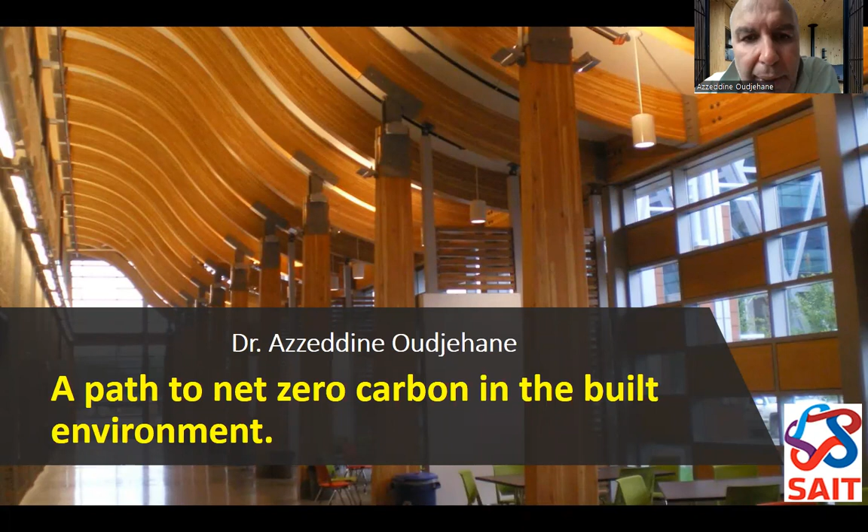My name is Azzeddine Oudjehane, and I welcome you from SAIT, Southern Alberta Institute of Technology. Of course, I'm not in Paris—these days I'm currently in Barcelona recording this video.

So briefly, who we are: SAIT, Southern Alberta Institute of Technology, College Polytechnic in Calgary, Alberta. You can see on the map, in the western part of Canada, east of the Rockies. In the picture you have a view of our building on campus, the School of Construction, where I teach as part of the construction management program, and where we emphasize not only construction, but also building better, sustainable construction for the future of the planet.

Myself, briefly, I've been involved in many projects over the past 30 years with experience primarily in R&D and innovation, also serving as board director for CaGBC, Canadian Green Building Council, for the Alberta chapter. Sustainability has always been a driver for my activities, and as a professor, as a trainer, as an educator, we try to bring the next generation to be conscientious about the planet and help them achieve the challenges we face.

Quickly, I would like to acknowledge a partnership that has enabled this work, focused on sustainability, working with European partners on how to build better with mass timber, with wood, and achieve sustainable goals in a common cause. The Europeans, Canada, and North America all have that objective in mind and how to achieve it.

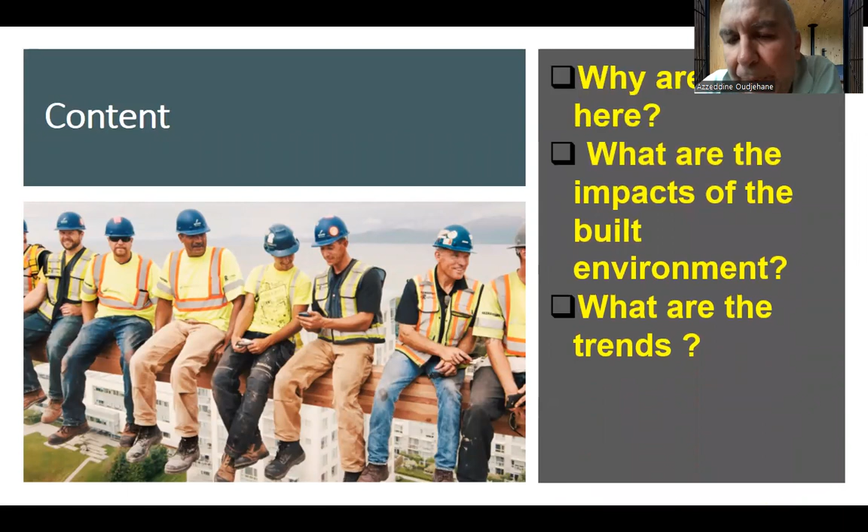So briefly today, what my talk will be this morning, focused around four key points. First of all, why are we here, and then what are the impacts on the built environment, but also what are the trends—are things changing in construction globally? And lastly, suggestions for one path to achieve net zero, or hopefully maybe carbon negative, by 2050.

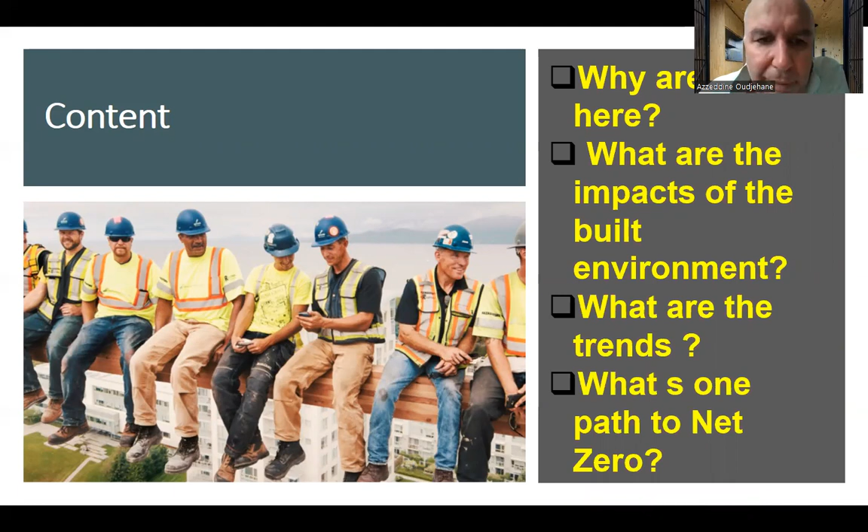So why are we here? Well, the planet is burning. Facts are there. But before we get going, I'll address two polls throughout this session, hopefully live with participants. This would be a recording that we play during the time slot for my presentation.

The first question I want to ask the audience is: is net zero achievable by 2050? What are you thinking? What are your thoughts on that? The audience is probably international here—do you think that is something we can achieve by 2050?

To do the poll, the question again is: net zero achievable by 2050. You have two ways to do it—use the QR code appearing here if you're using a phone device, or use a web browser going to www.menti.com and use the code showing on the slide, 78658815. I'll pause for a few seconds to allow everybody to capture the code and the website, or use the QR code. Again, the question is simple: is net zero achievable by 2050 in your country, or what are your thoughts on that?

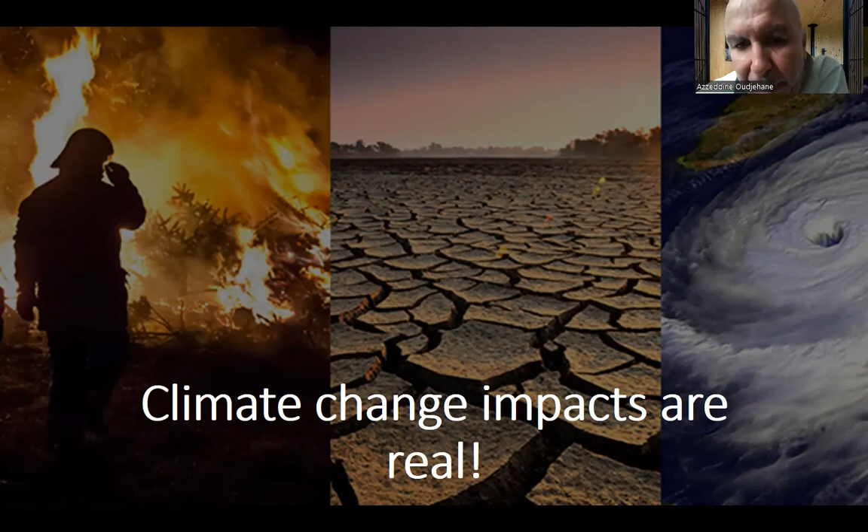We have a hot planet burning. Climate change impacts are facts, and they're real, right? They're not a hoax—whether it's rainstorms, rain rivers as we've seen in some parts of the world, drought, and just recently flooding in Pakistan, fires in California. We see these extreme weather patterns happening over the past decade, essentially as a result of our human activities on the planet over the past 50, 60 years particularly.

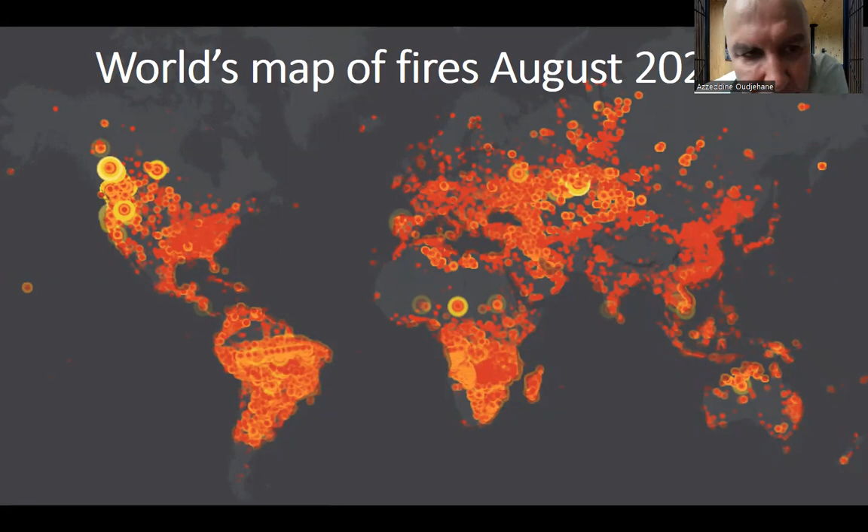A few weeks ago, I took this picture from a Canadian news website, reflecting the world's map of fires as of August 2022. You can see it—the planet basically is red, it's in flames with really hot spots. But I looked at it again through a NASA satellite image as of September 12, 2022.

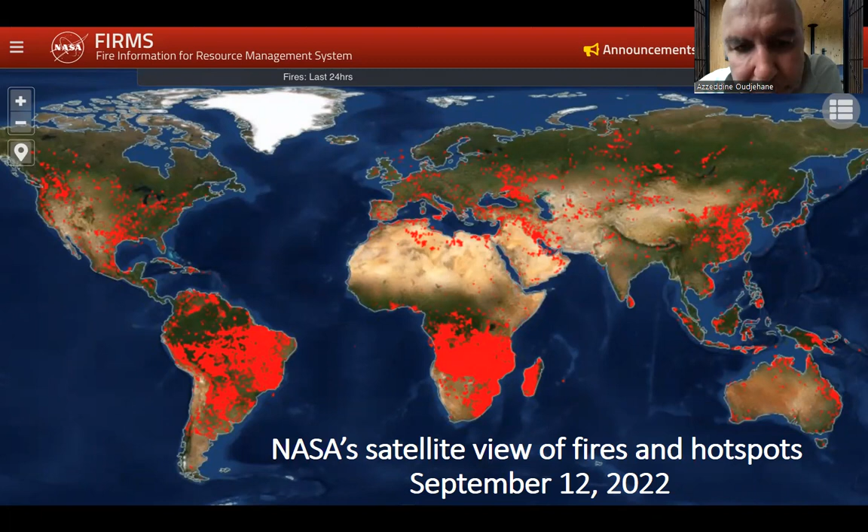What I think is interesting is the southern hemisphere, which isn't supposed to be in summer with the hottest weather, is now on fire—all the red representing active fires in Africa and South America, with a lot of red dots in North America, part of California and the western part, where there really has been hot, extreme weather. So that's real, that's happening.

So, having that in mind, the net zero challenge that we face is accelerating decarbonization worldwide, not just in Canada, not just in Europe, everywhere. And that's why we need a global perspective, as we are here at the Euro Global Climate Change Conference. We're trying to bring people from across the world to think and hopefully act and walk the walk towards net zero.

So can we achieve net zero while keeping rising temperatures below 2 degrees Celsius, which would be catastrophic by 2050? It is possible if we disrupt the way we build, the way we do our activities, use more renewable resources for energy, and reduce our energy consumption. Right? So it's two ways. Again, we need to renew, we need to reduce, and we need to reuse. That's kind of the pattern.

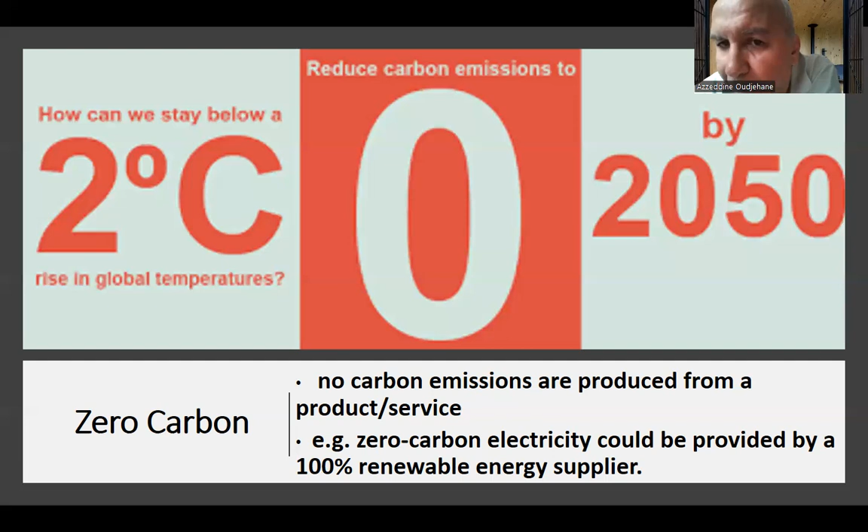So if we can find solutions, innovations that are completely achievable and feasible: 30% reduction by 2030, carbon neutral by 2050. That's the goal. That's where we're headed, and we have to do it.

So, some other facts, when we're dealing with the construction sector, you look at what is the impact of the built environment. By 2050 plus, the world will see growth in population. And growth in population means needing to build shelters, homes, offices, places, infrastructure. So within the next 30 plus years, 2.5 trillion square feet are expected of new built environment. We're going to 230 billion square meters. That's global. That's what will happen across the planet to sustain living for people.

What does that translate into? 230 billion square meters over 30 years. That's building one Paris a week... a year per week, right? So in short, 52 Paris towns, Paris cities, intramuros. For those of you in Paris who were supposed to be there for the conference, but that's outside — the conference is supposed to be outside the boundaries of the city of Paris. But nevertheless, Paris is a big, big city. So imagine building one Paris a week for the next 30 years.

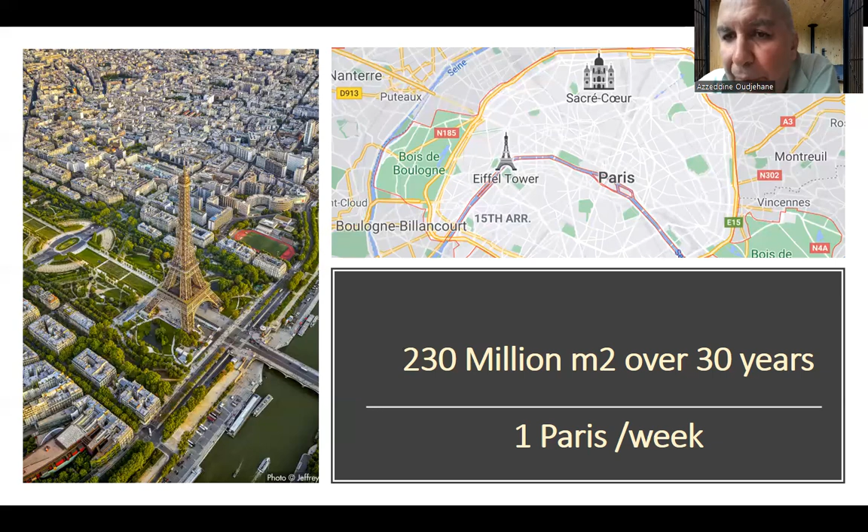That's a lot. Of course, the argument can be made: well, how about we use existing infrastructure, existing stock of buildings? Is that possible? A good research team will ask students to investigate that eventually. But yeah, so that's what we're faced with. So how can we build those new buildings, those new projects, and achieve them to be carbon zero, carbon neutral?

So the built environment, in fact, contributes to about 40% of the total CO2 emissions globally, right? 28 to 29% in the operation of buildings and projects, 11 to 12% is in the manufacturing, from the extraction of materials, manufacturing, processing, transportation, and construction. So from cradle to grave, to gate until we deliver projects, and then beyond that is the other 28% of CO2 emissions from heating, cooling, lighting, and operation of the building.

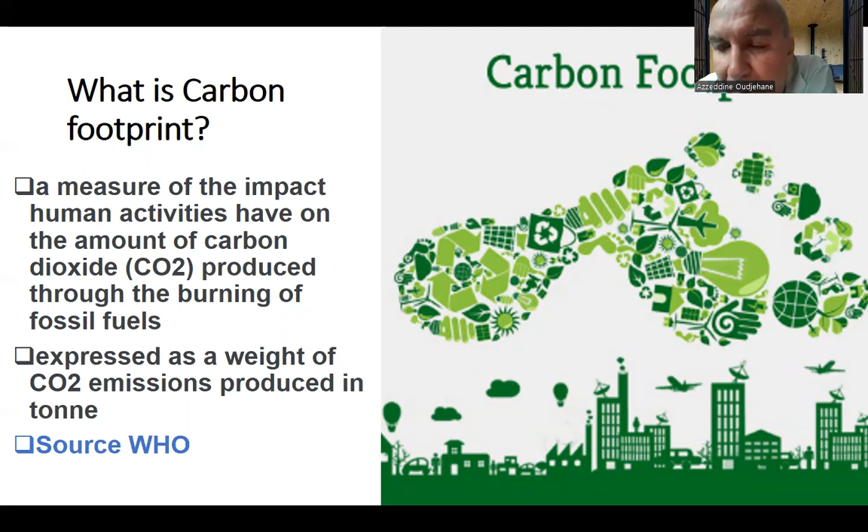So, bringing me to the definition of carbon footprint. I'm sure all of you are aware, but I just put here the definition of carbon footprint from the WHO, which is the impact that we have as humans — our activities, daily activities, going to work, consuming, using facilities in our homes, traveling, etc. All of those have an impact which is measured in metric tons of CO2 equivalent carbon emission. So that's our carbon footprint, and we all have one.

Conscientiously, I try to measure my carbon impact. For example, traveling to Paris for this conference would have meant about 3 tons of CO2 just for my travel — one round trip from Calgary to Paris would have meant emitting 3 tons personally, just for me.

Putting it in perspective of my heating and cooling emissions — using 2021 because it was carbon tracked — that's the household carbon emissions resulting from heating in the cold winters, and then a bit of cooling in summer, or very little, because homes are not necessarily air conditioned in that part of Canada. Nevertheless, you can see 2.5, even if it's household and divided by 2, that's 1.25 — half of what just one trip from Calgary to Paris would emit in CO2.

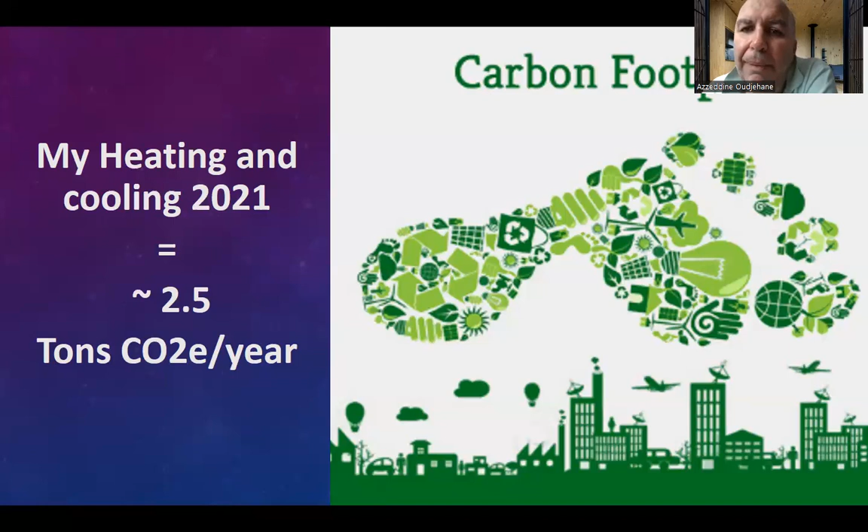So of course there are ways to offset, but first of all, we need to all individually be responsible, but at least be aware of our impact, individual impact in our daily life. When we know what we're emitting, what we're consuming, we can eventually transition into a healthier and less polluting aspect.

Which brings me to my first path towards net zero: creating that awareness. As an educator, as a trainer working with students and with colleagues, and with industry partners, it's about creating that awareness, sharing the information that we all have responsibility in our carbon footprint. That awareness is the first step towards a smooth transition and a possible acceptance of the change to new ways to build, to do our business.

Similarly, Google is stating that they are carbon neutral, and have been for the past 10 years, because they rely primarily on renewable resources for their energy consumption for offices and headquarters.

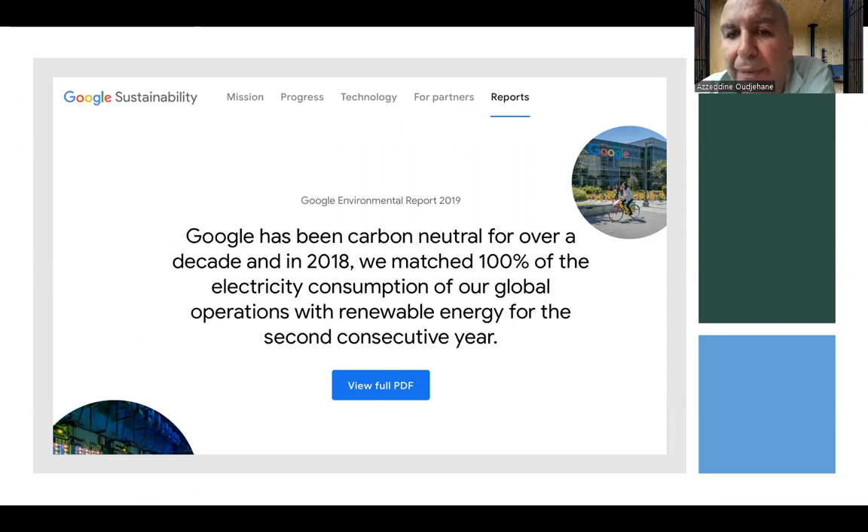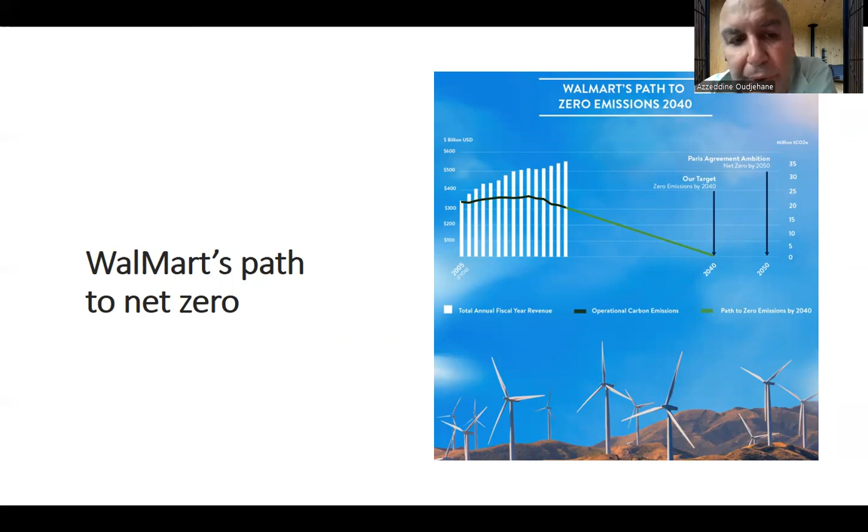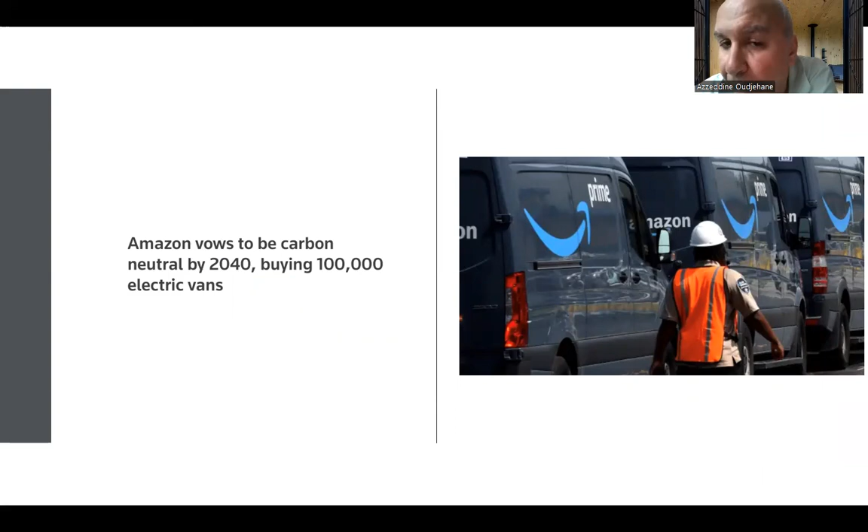So the other example I have is Walmart. Walmart's path to net zero by 2040, with all activities, diversity, and services and goods. Google, Amazon committing to being carbon neutral by 2040, and has committed to purchasing 100,000 vehicles by the end of this year or next year, enabling use of renewables again for distribution and so on.

So how can the built environment sector go green and net zero? Some examples - we talked about corporations, and that's where I'm bringing my second poll and second question, because it will relate to materials. What is your preferred building material? What do you like to use in your country or places of activities and businesses?

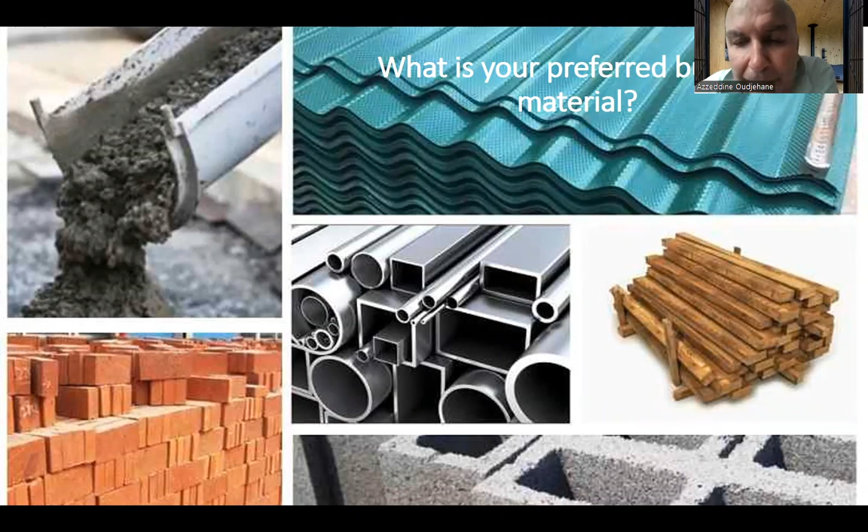And the question will be directed around three building materials, apologies for that - you could be using bricks, or cement and concrete, so relate that to concrete. So your options are wood, steel, or concrete. Question again: what is your preferred building material?

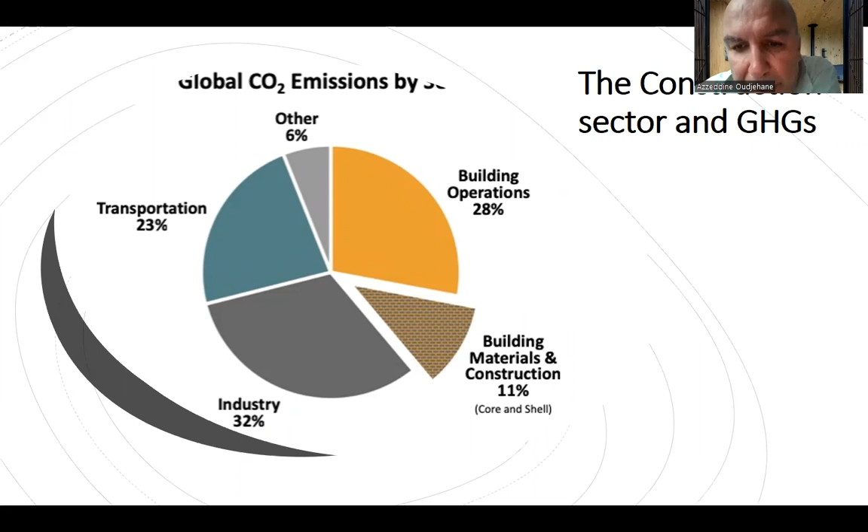All right, so we talked about the carbon emissions or GHG emissions from the building sector, contributing 28% in operation, and the rest in embodied carbon from manufacturing and construction. So how can we look at that?

For those of you who have chosen concrete as your building material, I'm not sure if you're aware, but sand, which is a major component of concrete, is the third largest resource extracted from the planet, after air and water. By 2030, it is expected that there'll be a severe shortage of sand to be used in concrete.

But in the context of environment and pollution, the concrete industry pollutes 4 times more than the airline industry. Talking about the airline industry, a few days ago I heard that Canada is purchasing electric hybrid airplanes, again to reduce that impact.

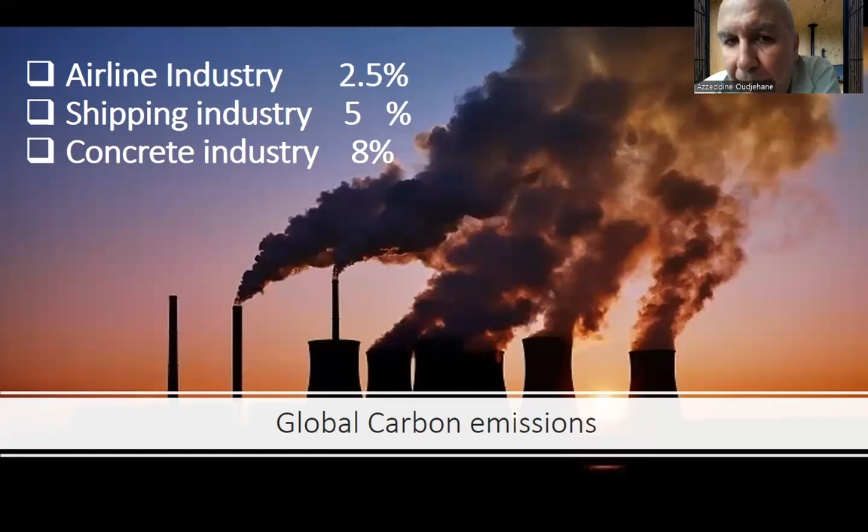So, shipping industry 5%, concrete industry 8%. If we can target to reduce that emission even for concrete, that's the challenge towards the concrete industry: to reduce the use of fossil fuel, find alternative, innovative approaches, manufacturing processes, and use alternate materials to cement to achieve that goal of reducing it by half. Even if we can achieve half of that, it will be a good objective to achieve by 2030, by 2050.

So what are the trends in construction? We just started with construction, cement, the concrete industry. We talked about corporations - now I'm going to use a local company, Canadian Chandos Construction, with a goal to be net zero by 2040.

Part of their commitment is changing the way they do business, forcing and fostering that their contractors and suppliers abide by the same goal - otherwise, they won't do business with them. So that's a driver trying to drag the suppliers and related sectors of construction to also be carbon neutral and net zero by a certain date, ideally 2040.

I talked about Walmart - why Walmart? Walmart is building headquarters in the southern United States, and part of their goal is to build a large campus for training and offices using sustainable green building material, wood in general, right?

Of course, it's not 100% - there will be concrete and steel, but the predominant material will be wood to offset all the emissions or carbon emissions from other material sources and methods.

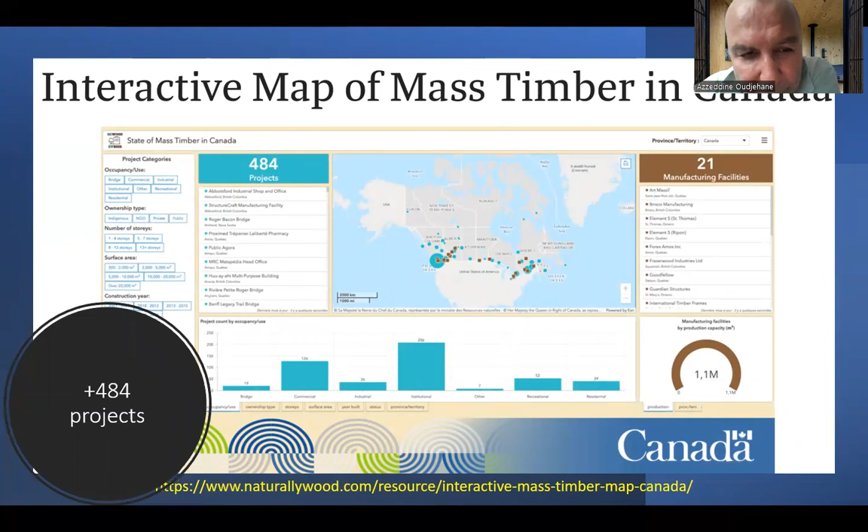So wood is trending indeed, right? Every week, or every month at least, we hear about new projects using wood, to the extent that wood has become the building material of the future, being the priority. It has been the race - we can go through a few impacts here, interactive maps for building projects across Canada.

Using mass timber growth, 400 projects over the past 3 years. The growth is even larger in the United States. We mentioned Google, Amazon, Walmart, Microsoft building exclusively using mass timber - 1,400 projects with construction planned for the next year or so.

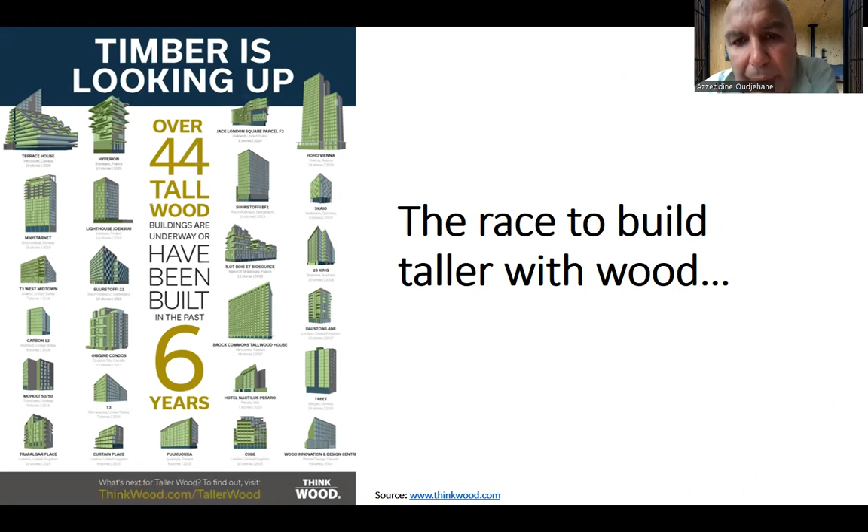Why build taller is essentially to showcase the capacity of wood to achieve those goals and substitute other less green or less sustainable friendly materials. This was the start in Vancouver, British Columbia, with the University of British Columbia, a tall building built primarily using mass timber, glulam, and CLT, with concrete for foundations or the main podium floor, as well as the elevator shafts, and as you can see in the picture, steel connections. So it is hybrid, but it's predominantly using wood as the building material.

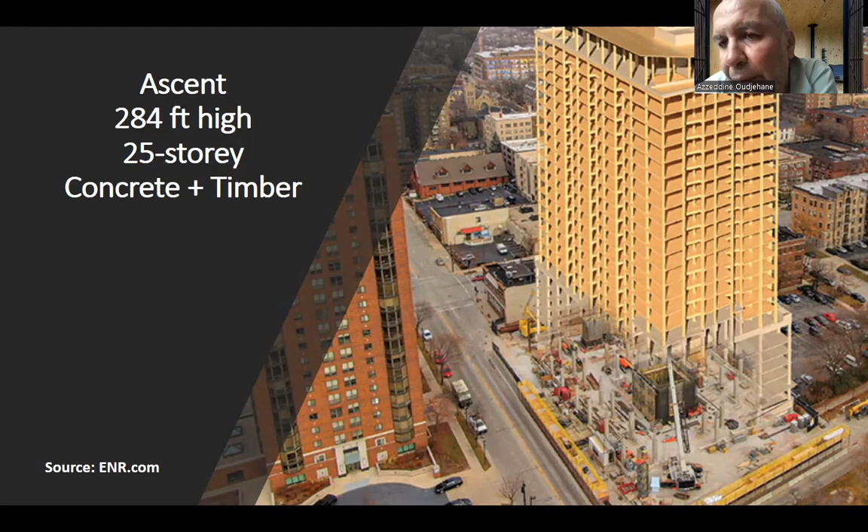Going around the globe to Vienna, another tall building using mass timber. And then that race to building taller comes to the luxury building in Milwaukee, Wisconsin, the tallest now today, completed a few months ago. You can see in this picture the glass wall curtain. However, the structure is all wood, CLT, and glulam if I recall. Again, hybrid, with a 4-story concrete podium with parking.

Concept for other buildings in Sydney, Australia, planned for 2025, with greenery making it a very sustainable construction. Again, that's the trend we observe in the construction sector.

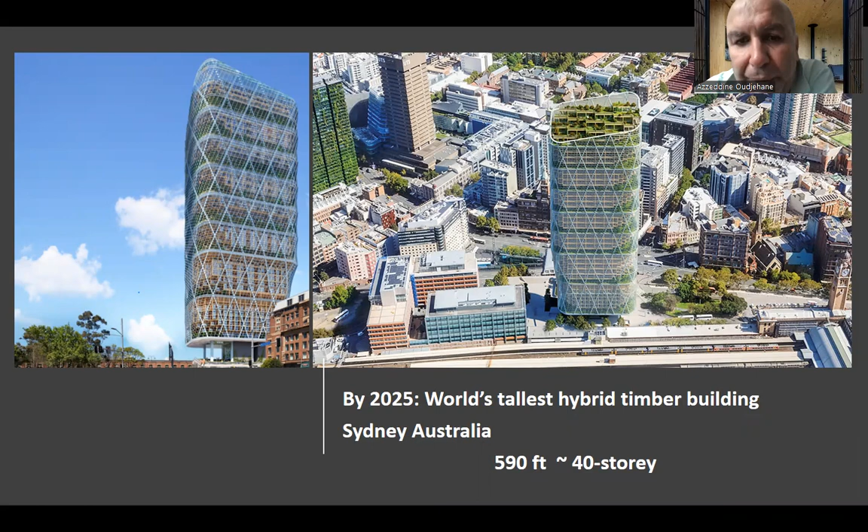But why build with wood? Well, every time I ask that question, it's around sustainability, environmental impact, and also constructability - we have to match, for businesses, being productive, as well as being sustainable. So looking at the life cycle impact.

To make a sustainable case for wood building, we looked at the return from COVID, the consciousness about the indoor environment, the health impact that buildings have, and how for a year or two the world has lowered its impact on carbon. So we want to continue that trend.

I found that to understand carbon, we have two concepts: embodied carbon, which is cradle to gate, and then operational carbon, from gate to grave, or at least to the reuse of the building at the end of its life cycle. The two are important - they contribute differently.

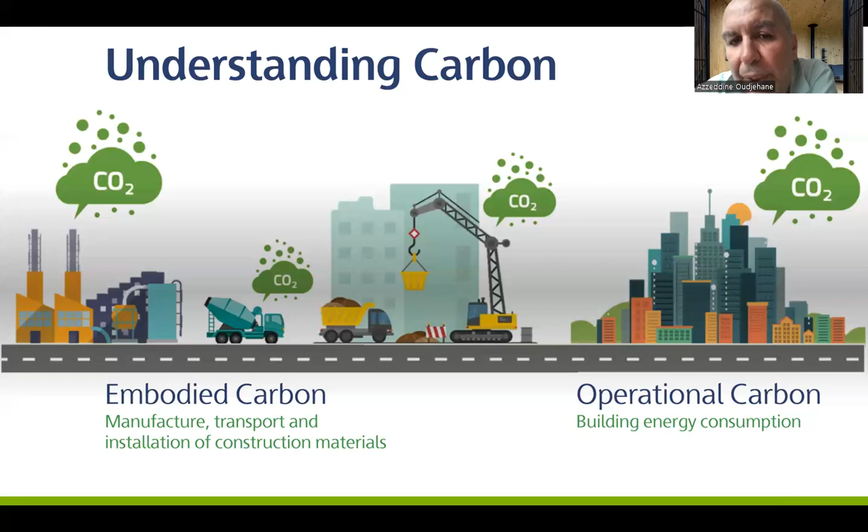We can control the operation by changing to renewable resources, but embodied carbon has up until now not been considered as often as possible, and that's really the focus of the construction sector these days - that's where the change of material comes into play.

So operation carbon is that used throughout the life cycle of the building, from delivery until its end of life, or reusability ideally. The embodied carbon is the one from the manufacturing process, from cradle to gate.

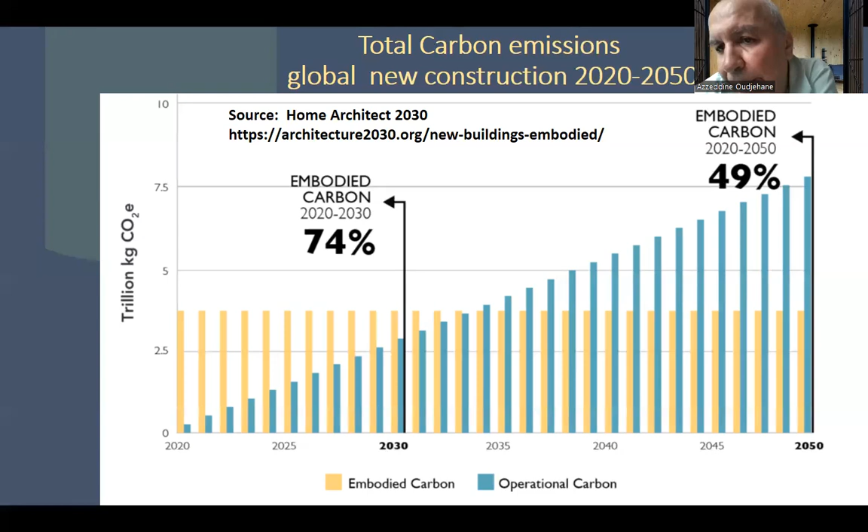So if we can manage to reduce the energy use of our buildings for heating and cooling, finding alternatives, we can certainly reduce the impact. But more importantly, if we were to take the yellow curve to zero, then by 2050 we will have less or negative impact. That's the path that we propose as a path to net zero in construction or in the built environment.

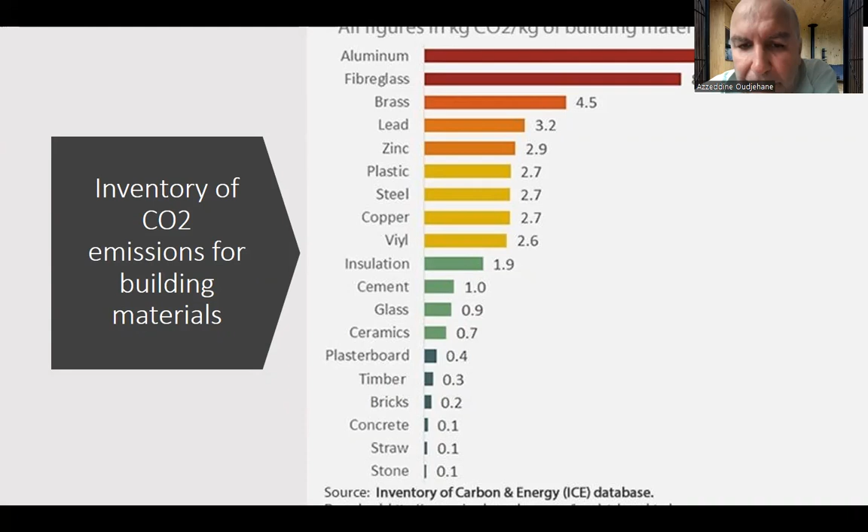A little bit of an inventory of CO2 emissions by material - you can see here from aluminum to the lowest, stone. What we can notice is natural materials have lower environmental impact. One material that we don't see in this list is wood, because in fact, why build with wood? Because it is a carbon sink.

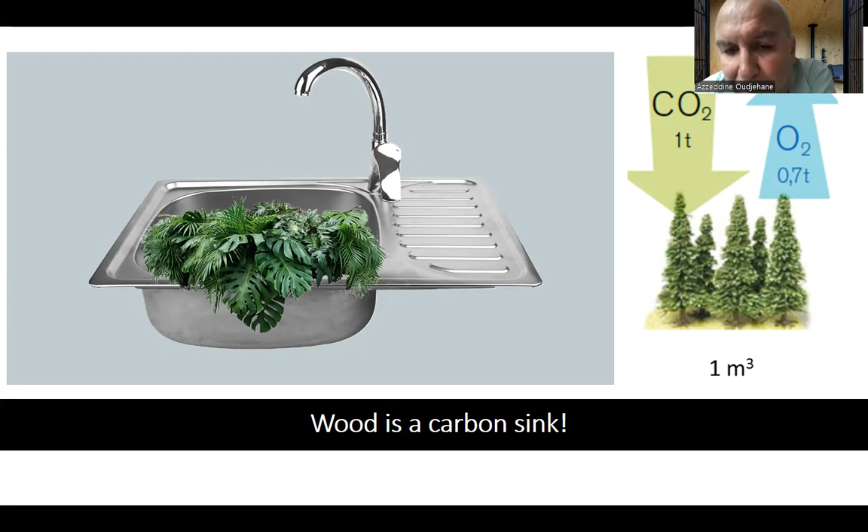1 cubic meter of forest or tree is equivalent to 1 ton of carbon, which is why it is the preferred material as a carbon sink.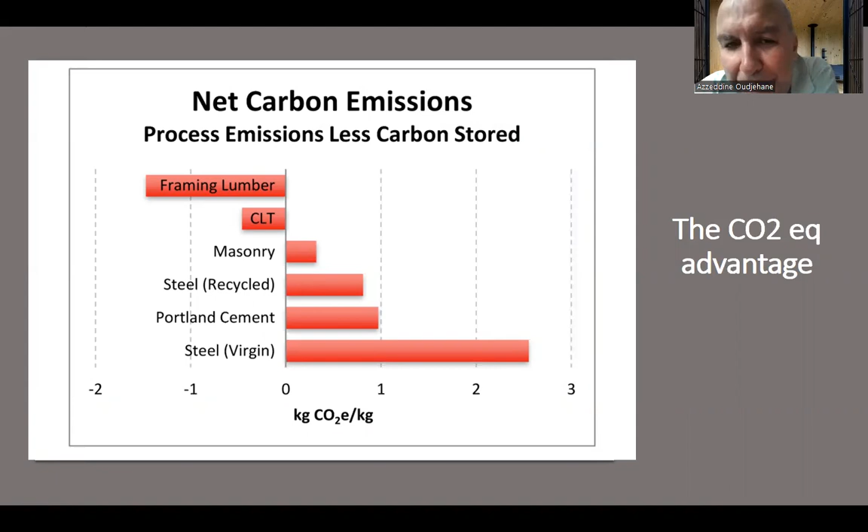Continuing on our path to net zero built environment, what we are looking at, again, through a simulation similar to that chart that I displayed a few slides ago, is what if we use carbon neutral or carbon negative material? The embodied carbon is negative. And if we can manage the impact over the next 35, 40 years with our emissions through building operation and maintenance, by the time we get to 2050, that will be offset by the embodied carbon that we have in the material.

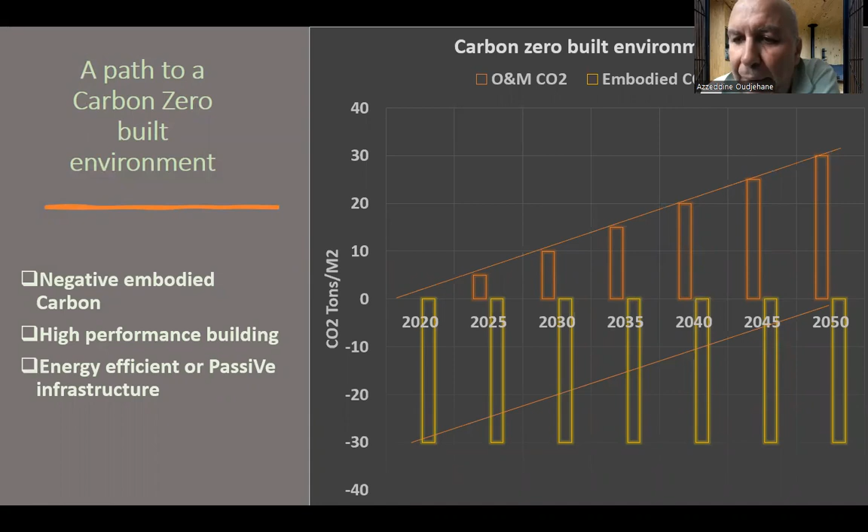So the building will be at least carbon neutral, if not negative, depending on the construction type and so on. That's the path we're suggesting: using negative carbon materials at the start and having the embodied carbon be negative so it can offset the total.

So we looked at it through a simulation for a 10-story building here, highlighted on the left. And of course, the question that has always been asked is, okay, we can do that in Canada, we can do that in North America and parts of Europe where trees are available. What about the rest of the world? How can we sustain that?

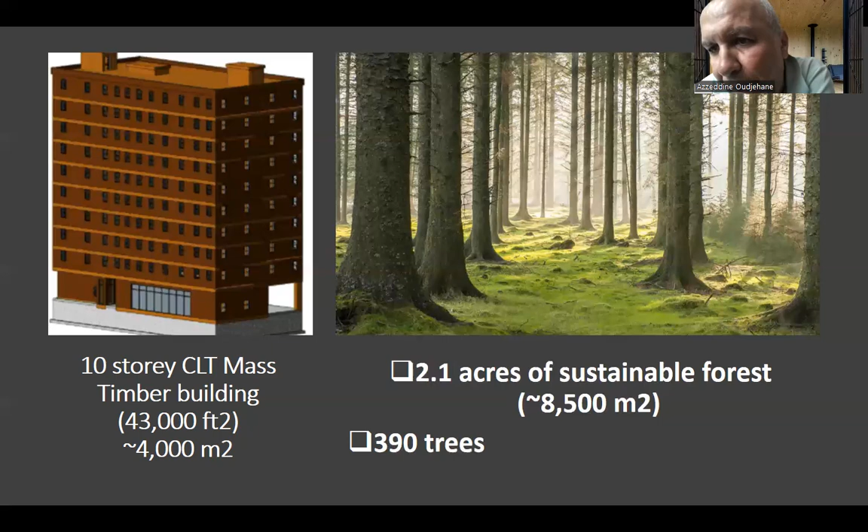A 10-story building like this would require about 390 trees. That may sound like a lot or not much, and the forest has to also be sustainably managed. So we cut a tree, we plant a tree to maintain it and make it sustainable. Of course, in countries like Canada, that's possible.

But when we're looking at the EUIs, the operation and maintenance, we compared two buildings for Calgary weather using concrete versus wood. The buildings perform more or less similarly, with a bit of advantage to the concrete building because of its thermal mass, but nothing significant.

So in this case, the whole building operation relies on the source of energy. We use renewables—solar, wind, other types of non-fossil fuel—to heat, cool, and enable electricity and energy. That's the key, because the buildings will perform equally the same whether you use one material versus another.

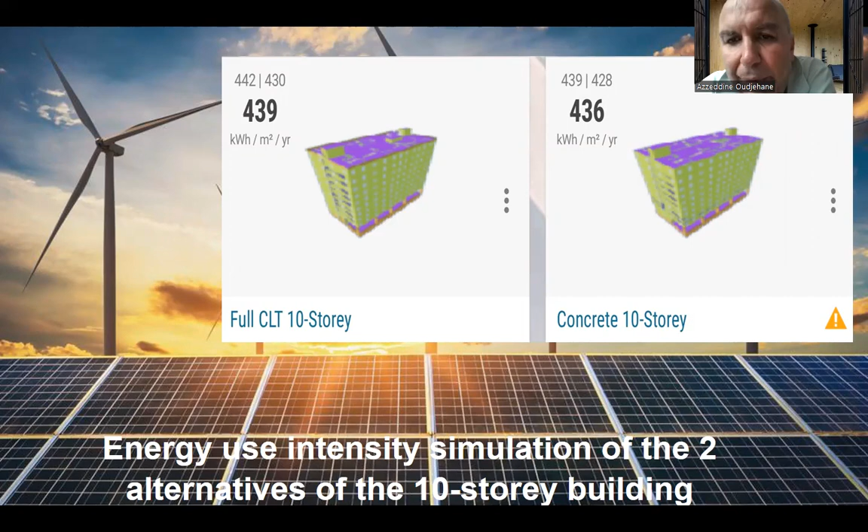The biggest difference is in the embodied part. As we have seen so far, wood being a carbon sink will enable taking CO2 off the project and off the building. For example, our 10-story building would benefit from 2,350 metric tons of CO2 not going into the atmosphere. That's the biggest advantage that wood construction would have.

We looked at the impact of other similar comparisons. So if we do a light frame building, 6-story, 12,000 square feet, what type of alternative methods can we do? We did it with light frame using small pieces of wood, with a carbon benefit of 350 to 360 tons.

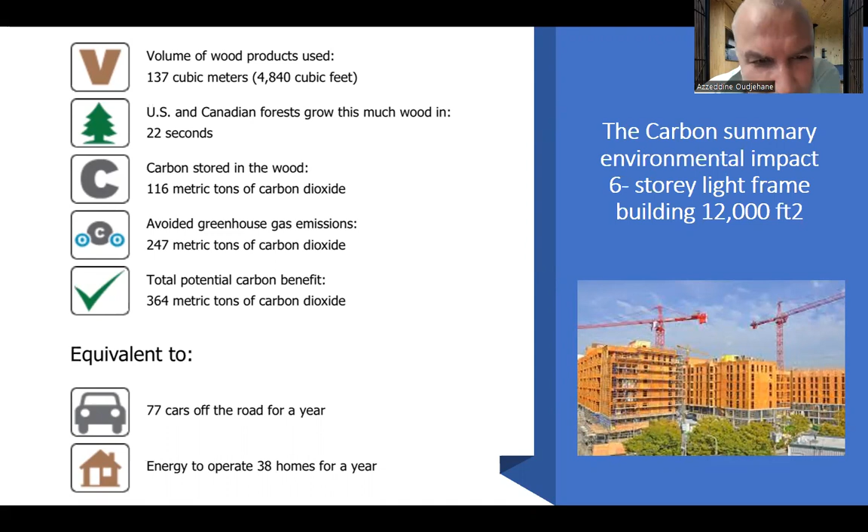And then we looked at it using mass timber, glulam, CLT, because wood is massive. In this case, solid wood gives us a larger reduction in benefit and carbon emissions—in this case, 600, twice as much. But the cost may be consequential.

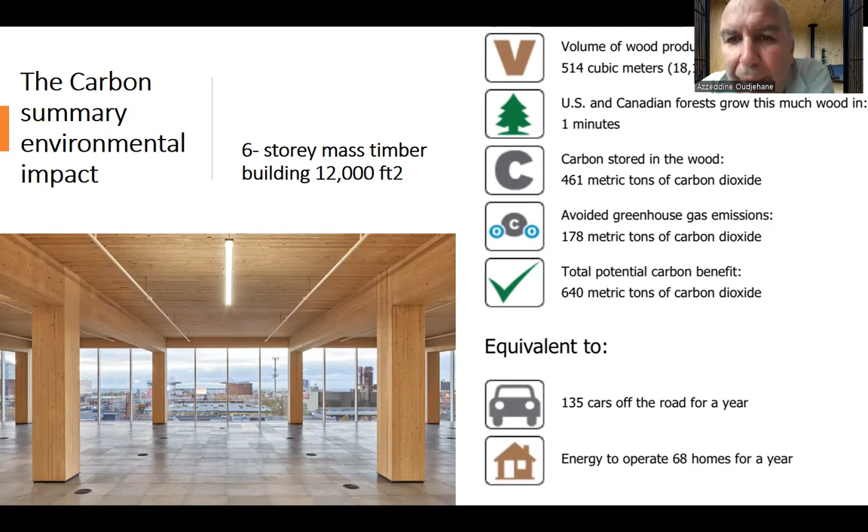And then, creating that awareness is key to bringing everybody on board and moving the disruptive change for the way we build. So, last few words, the key takeaway.

Can the building environment, or the built environment, achieve the net zero goal? Yes, that's my goal and my hope, and we can continue that, because through using alternatives such as mass timber, we can certainly achieve that, in addition to other benefits to indoor air quality.

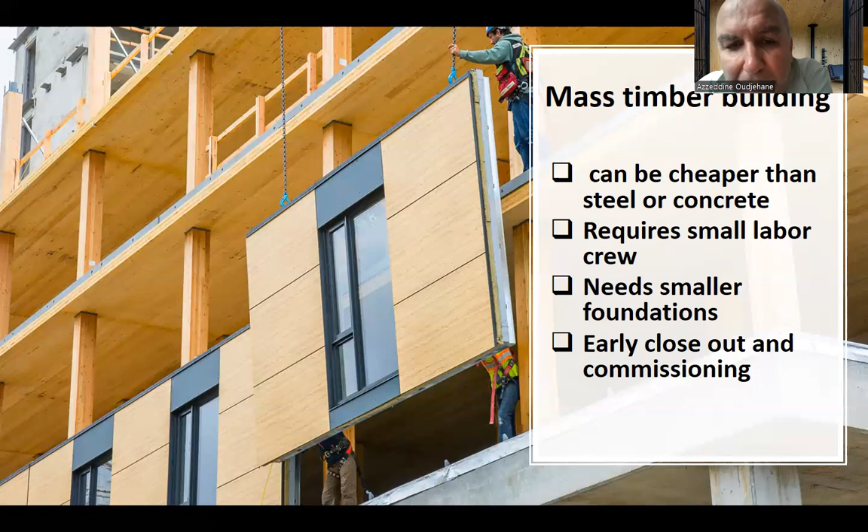We spend more than 90% of our time indoors. We did spend 100% of our time indoors during the pandemic, and so it is important that both our indoor air quality and our outdoor air quality remain clean and healthy for humanity over the next 20 to 30 years. On that, I'll thank you for your attention.